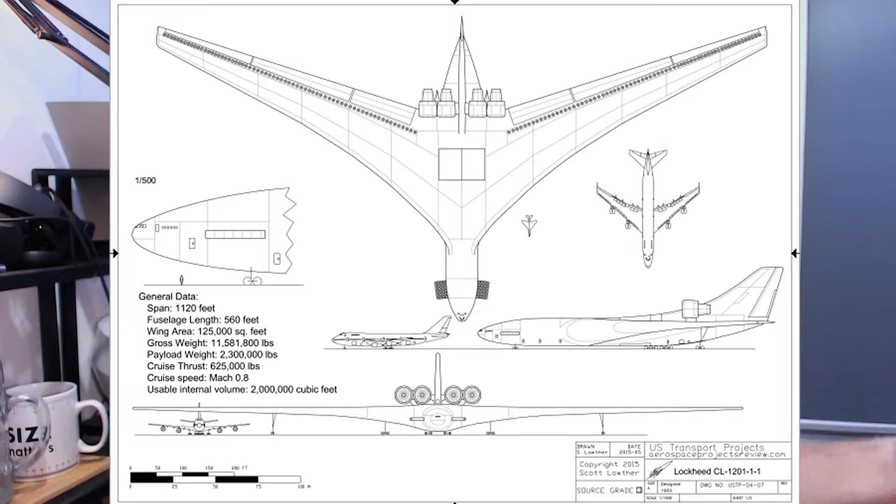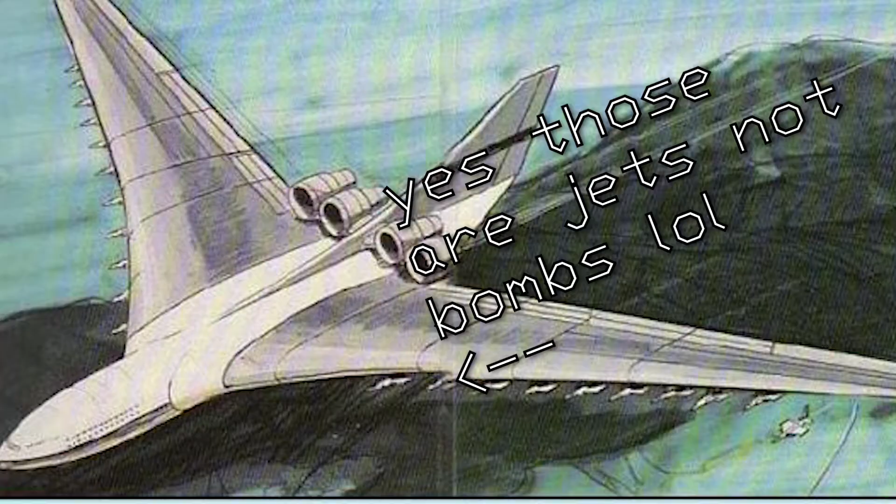It's a plane with a wingspan of 1,120 feet. This thing would put, looking at the picture, you'd probably get about 5 747s wingtip to wingtip. It's that big. It's huge, it's massive, go look it up, it's the Lockheed CL-1201. It was enormous. It had a big nuclear reactor in it to power the massive turbofans. It was insane, it was insane.

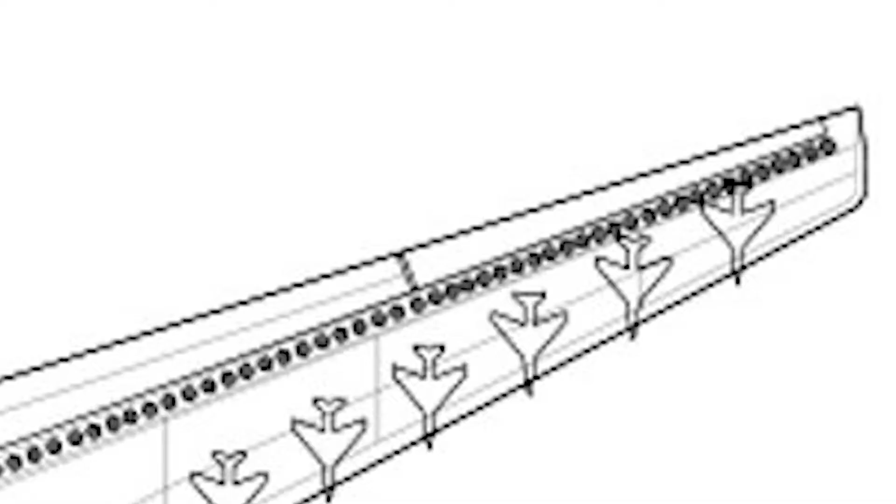And it would take off vertically. They planned to put 200-something engines in it, just standing upright along the wings in a line, and then they had a cluster of 20 of them on this front canard thing. What? It's bananas. So I looked at this thing and thought, I would love to build this thing.

It's ridiculous, I wouldn't build it ridiculously big, but because of the shape of it, and how thick it is, I would go about designing it with a different build methodology. So we wouldn't 3D print the parts for it. Instead, I would 3D print the molds, and actually pull a fiberglass shell or a carbon fiber shell, pretty much like Ramy RC does for his big planes.

I wouldn't build it that big, but because of how thick some of the fuselage sections are, it wouldn't make sense to use fully plastic or resin forms, even with a substructure. It would make far more sense to 3D print molds, make skins, and then 3D print individual lightweight rib sections I could stagger inside of it. That would work out better.

So I jumped into Inventor to start designing out the form. Let's jump into the time lapse, and I'll see you on the other side of it.

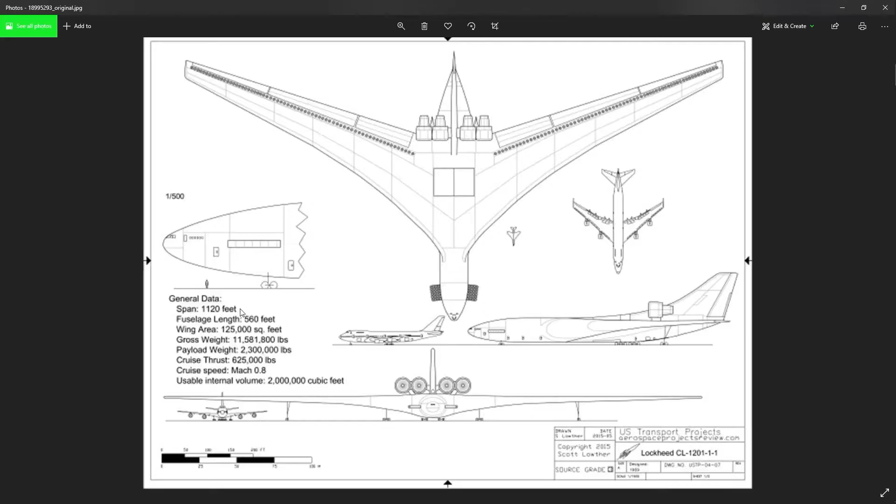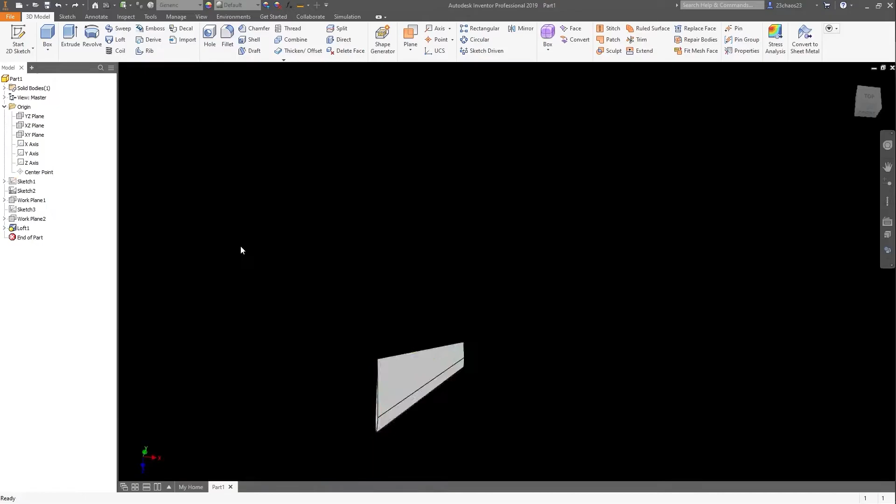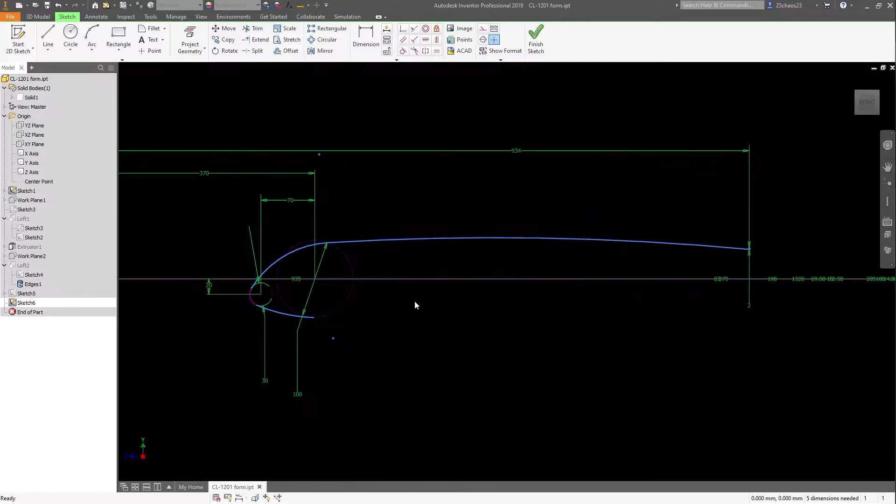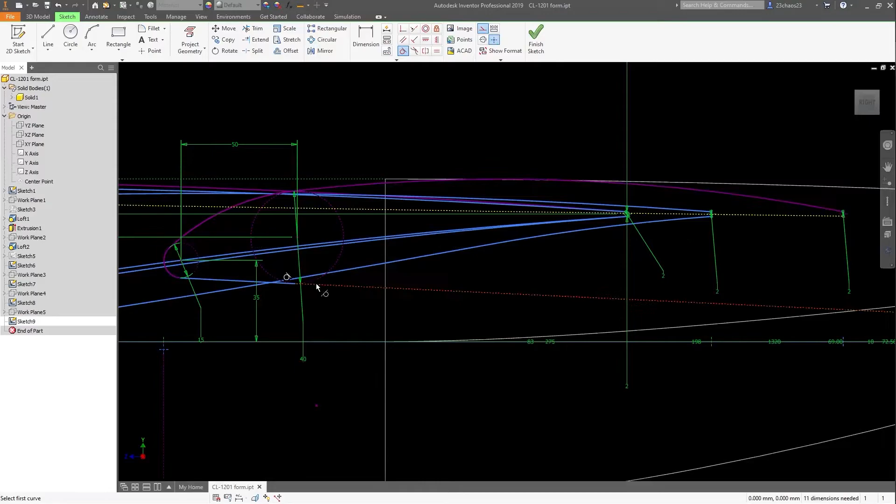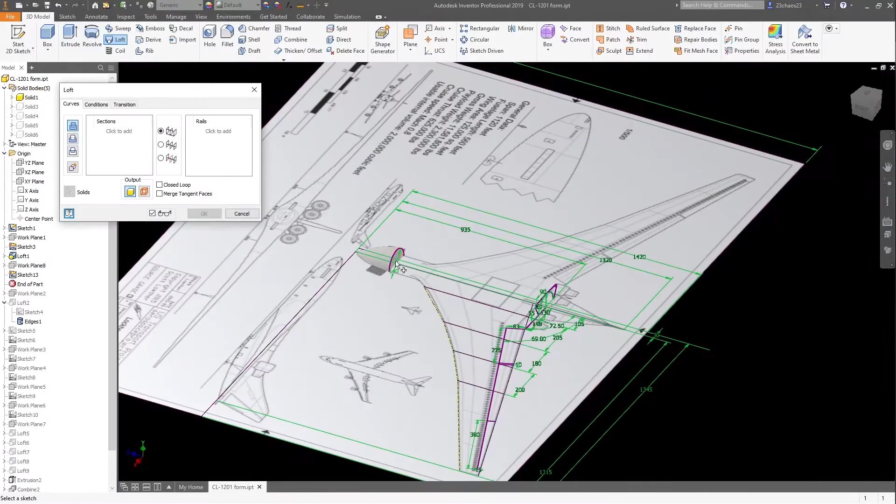So there you have it. What did we learn? The lesson of today is always save. Save often, save frequent, save like Jesus, because Jesus saves. That crash at the beginning there where I got it, it was for the better. The way I did it the first time was crap, right? Let's be honest here. The way I do anything the first time is always crap, and I think that's true for most people. We generally do things a couple times before we get it just right.

Where I'm at now with it, I kind of like it. I'm still going to go back and change a few things. I'm playing with the form, I'm playing with the design, because the drawings that are available that I have... I have words about them that I'm not going to say. Let's just leave it at that. So yeah, I'm going to play with the design. It was a concept plane, never built, so I have quite a bit of leeway and freedom in what I want to do with it. For starters, I'm not putting that front canard on it. It's not happening. It was never designed to be an aerodynamic shape, it didn't move or anything. It was literally an outboard housing for the clusters of 20 engines each side, and I think they would have retracted in or something. From looking at the designs, it looks like something that would slide in and out of the fuselage.